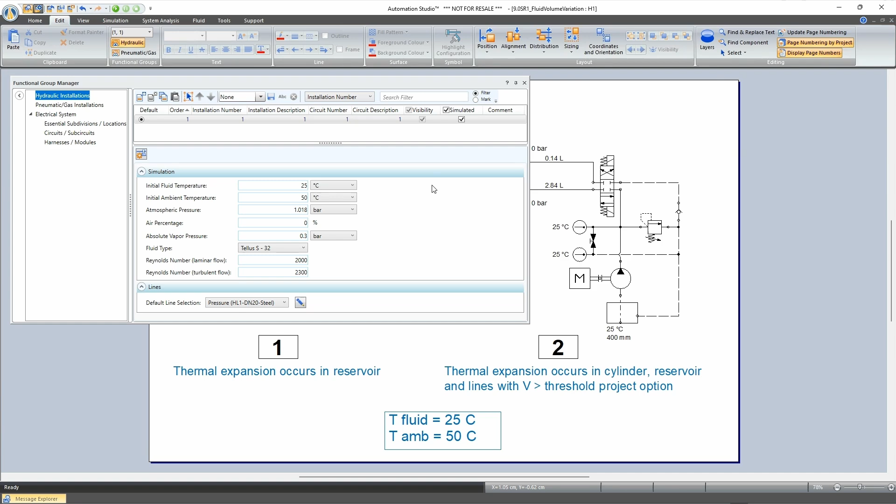So let's say if we want to evaluate the evolution of temperature in a project like this one, first we need to turn on the thermal evolution in the simulation options. In the hydraulic installations, we also have this setup. We have an ambient temperature of 50 degrees Celsius and an initial fluid temperature of 25 Celsius. This will lead to an increase of the fluid temperature by heat dissipation.

We start the simulation. We can see that the fluid starts at 25 Celsius and its temperature is gradually increasing. We can also see that the density of the fluid is changing with temperature. Here I've increased the thermal coefficient of components just so we can see things happening a little bit faster.

But what we don't have right now is a variation in the volume of the fluid. So here we can see the height in the tank does not change. That doesn't completely make sense physically. We should also see an increase in the volume of fluid in this closed loop as soon as the density decreases, aka the specific volume increases.

So previously, we didn't really worry about that too much. For example, for pressure drop calculation, the density of the fluid is the parameter that has an influence. But for some components like reservoirs, cylinders, accumulators, this can be a problem. So for this reason, in version 9, we now have the option to also turn on the thermal expansion of the fluid.

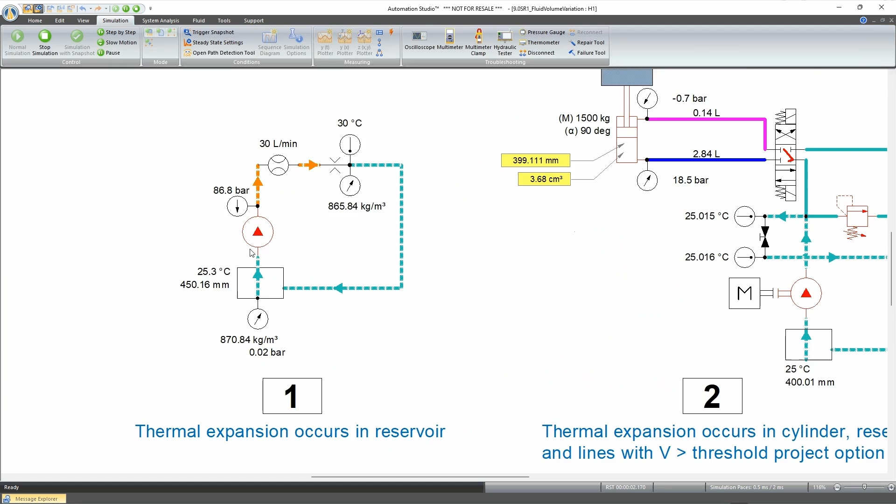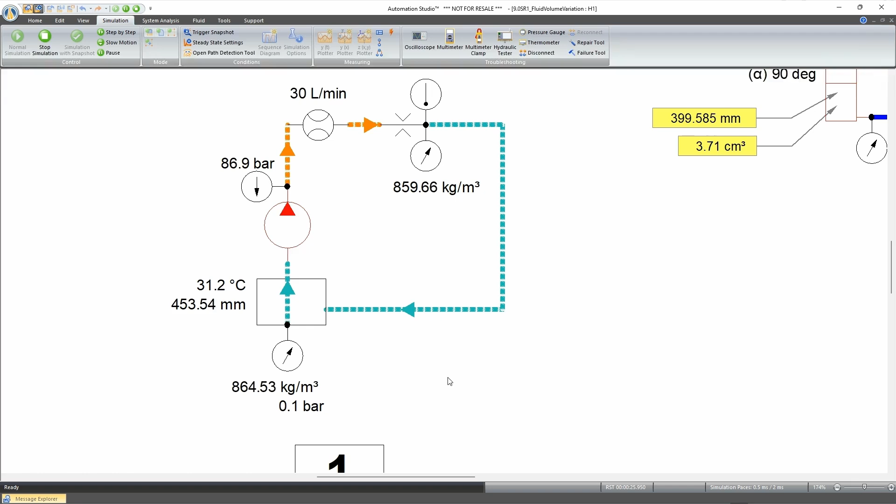Okay, so if we simulate again, now we can see the density changes with temperature, but so does the volume, as we can see by the height of fluid in the tank. This increase in the volume now is entirely due to thermal expansion. We can also see the effect of this on the pressure in the tank, which is slowly rising. And if we were to let this go for some time until the closed volume becomes saturated, we will see the pressure build up fairly quickly.

And we'll see this in cylinders as well, for example. Here we have a mass pushing downwards on the piston and the fluid is trapped. Initially the weight has compressed the fluid a little and then the piston slightly retracted, but then the volume increase builds up pressure, generating a higher force on the piston side than on the rod side. So the piston extends very slightly, but we're able to measure this. We can also see the measurement of the compressed volume on the piston side increasing.

So with this example, we can simulate what happens, for example, if a machine is left in the sun for a while and the fluid is heating up. We can show how the cylinder piston will slightly move due to that effect.

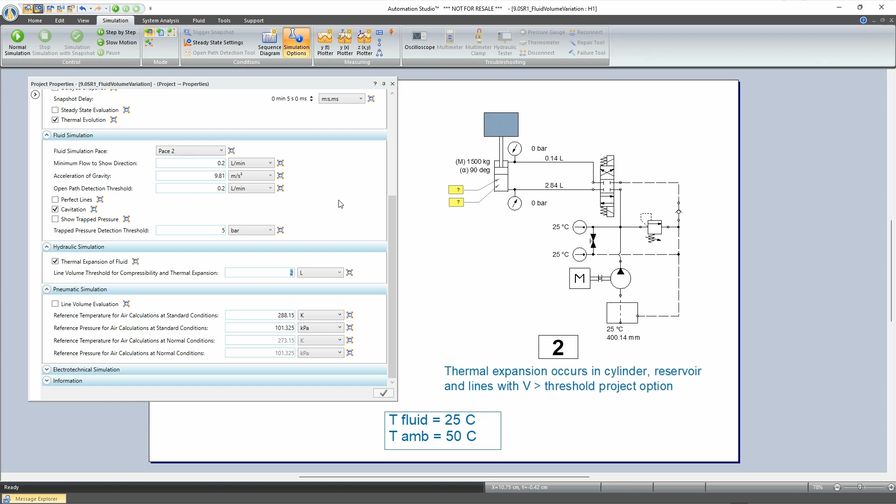So now this is taken into account in components, and this includes the volume in the lines as well. In the case of lines, there's an additional option: a threshold in the project options, meaning lines with a volume below this value will disregard thermal expansion. This mainly avoids running this calculation on every line of the project, which can consume computer resources not necessarily needed.

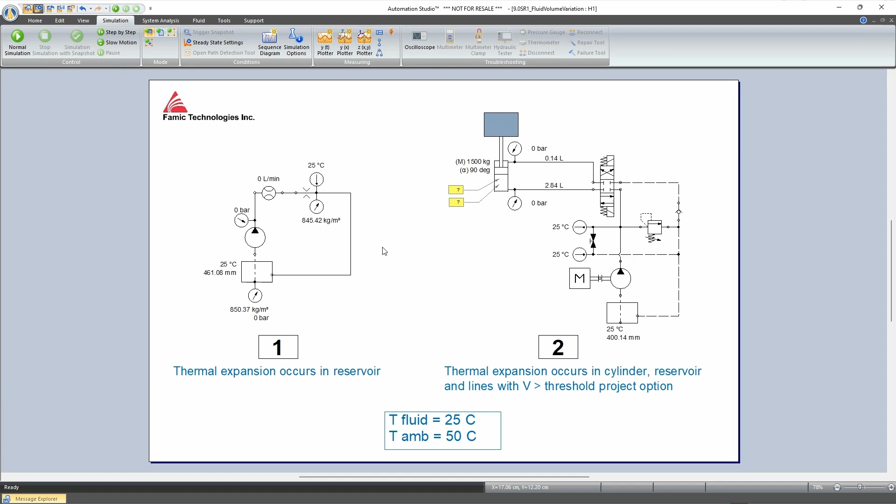One last thing to clarify: when we say thermal expansion, it does include the volume variation both ways. When the fluid cools down, we will also see a contraction of the volume. So that covers the essentials for this. We can move to the next topic.

This next feature is the possibility to display fields in bill of materials and reports in multiple languages at the same time.

Here we have an example project with a bill of materials already started with some configuration. We can see the component name property of the components used as a BOM field, and it's actually repeated 3 times in 3 languages: English, French, and Spanish.

We are using for this the translation manager, found here, which is first a tool that allows users to enter translations for text and display them in a chosen language, depending on who the project is shown to, independently of the current language of Automation Studio's interface. But the translation manager can only have one display language at a time.

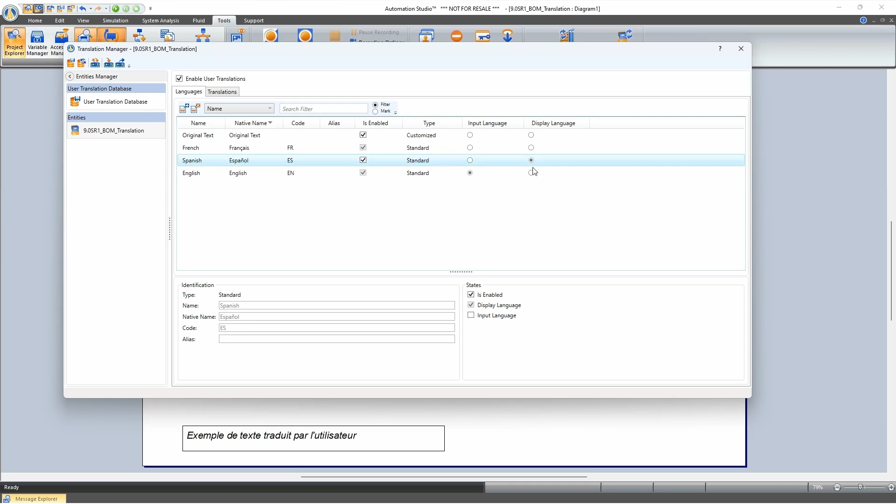What's new in BOM and reports is that you can now add a user translated property as a field, refer it to an existing property, and choose a language locally for this field. So I'm going to add another description for a few of the components in the BOM and have it display in 3 languages. I'll go back to the translation manager for this.

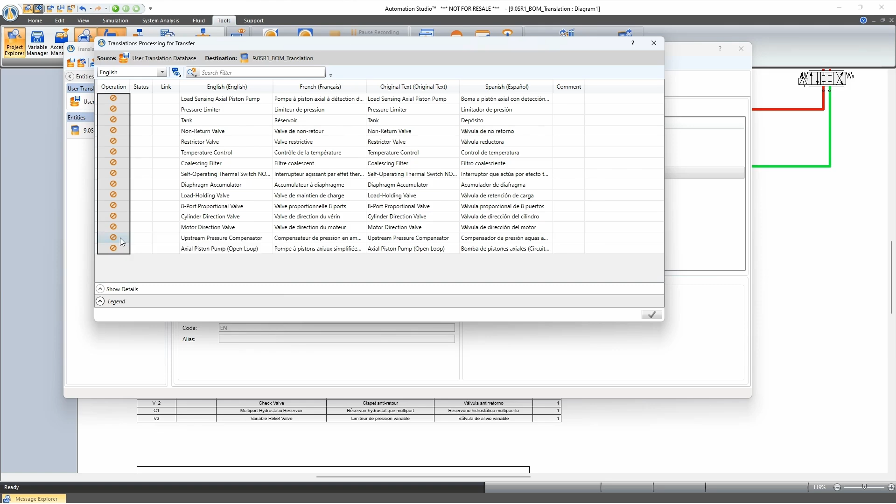First, I'm going to import the translations from the central user database into the project by transferring their dictionaries. These are the translations I'm importing into the dictionary of my project. We select the ones we want and apply. I could also directly import them into the project from a CSV file.

They are now added to the project along with the ones that were already there. Apply, close. So now in the BOM fields, we're going to add the catalog description property in 3 languages.

The values for this property are already entered in the components, in that property, in English. So first we're going to add the user translated property in English. We add a field, a user translated property, give it a name and an alias, and then refer it to an existing property, selecting which language it should be.

We see it up here. Then I'm going to do the same thing but in French: add a user translated property, refer it to the same property, set the display language, and finally do the same in Spanish.

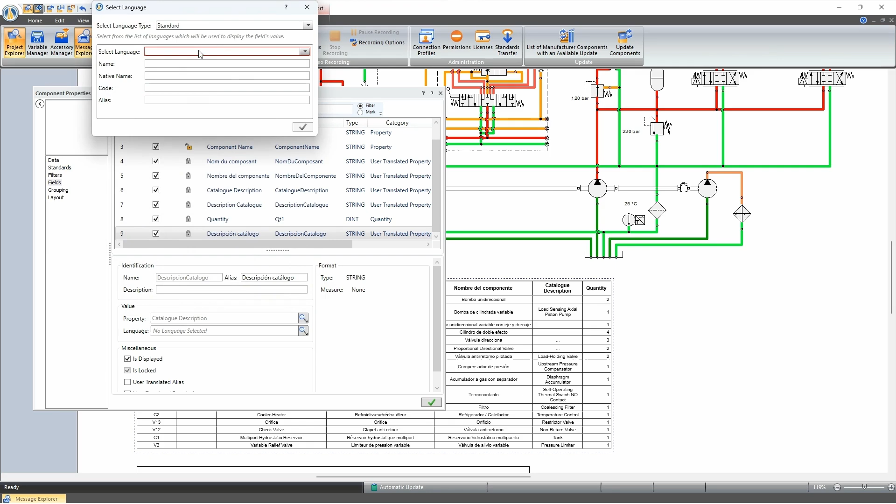We apply. Now we have the value of this field for the relevant components translated into multiple languages at the same time, independently of the current display language of the translation manager and of the interface language. They're always displayed in multiple languages at the same time without having to change any other language setting.

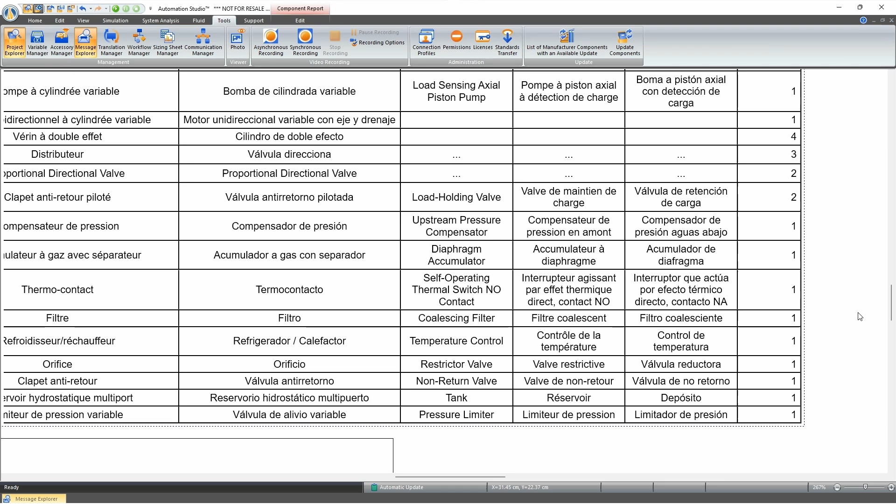And of course, the same thing is also possible in the spreadsheet reports. We can see here it is already done. That's pretty much it for this. Moving on to the next topic.

This next feature is the ability to display highlighting colors in areas of component symbols to identify some functions or states, including in simulation.

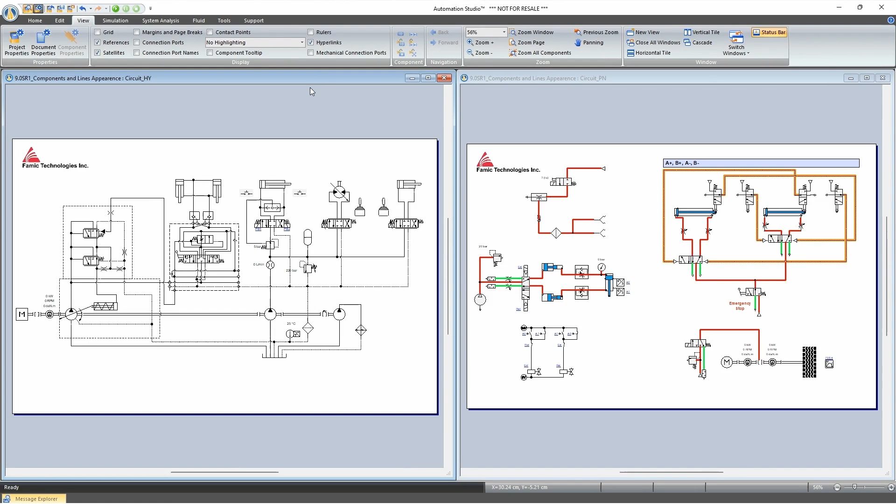If we start with this circuit, we have a clean black and white schematic, nothing else. First, we can turn on the highlighting of the fluid lines. With the configuration of standards already done in this project, we can more clearly separate the different line functions, such as pressure lines, return lines, suction, etc. Then we can also turn on this highlighting for components as well.

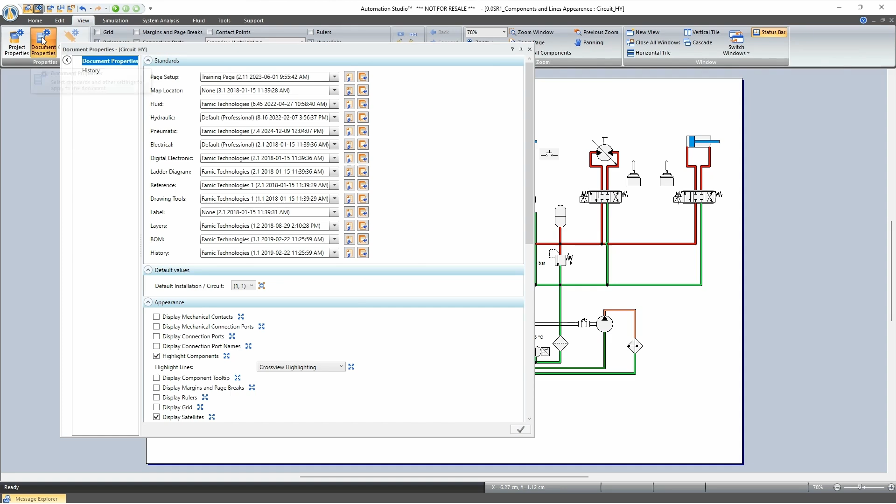So now we have, while in edition mode, the mobile parts highlighted in blue in the symbols, such as the cylinder pistons, and most of the other component surfaces shown in a light gray color.

If we start the simulation, now we can see colors starting to show up in some components. First, we have a dark gray for inactive states and yellow for active states. We see which spool positions are currently in use in directional valves.

We see the engine is turning, but it is not transmitting to the pump. Engage the clutch. So now the variable piston pump is activated.

We can see the pressure colors in the volume of the control piston, also in the fluid side of the accumulator. It's also showing another color to indicate a pressurized gas on the other side. We can see a few other valves and other elements show the active yellow color when there is flow or when they're doing their main function. So we can see the color of the different activated components and the color of pressurized volumes.

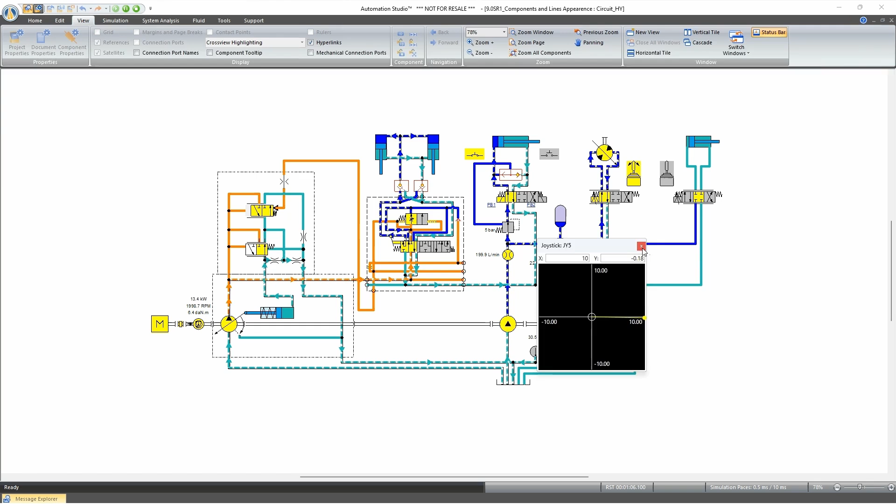There can also be a distinct color in lines and component volumes to indicate a trapped pressure when it's above a certain threshold value.

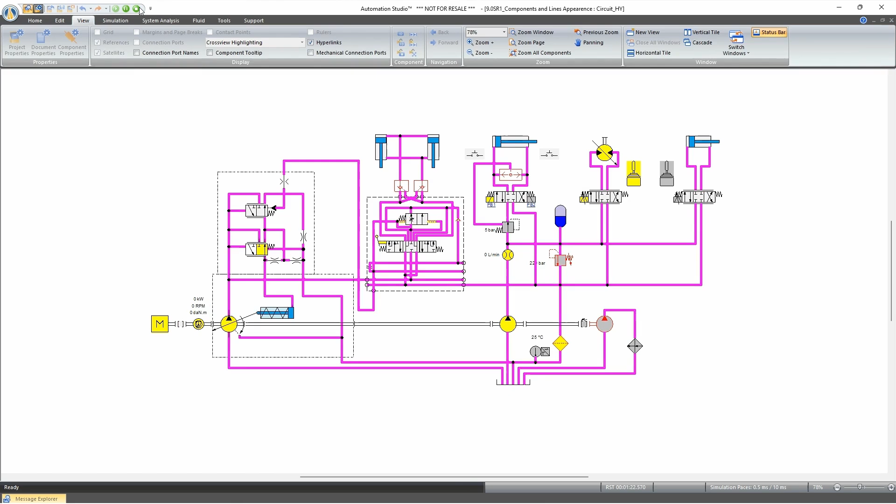So these different colors come from the configuration in the project properties. There is a category of standards for component appearance where all these things can be customized.

So we can see here the colors that we have seen on the various parts of the schematic. The symbol, line, color, and thickness can also be modified. And this standard can be attributed by type of component in the document standard.

So we could also choose to have some of those appearance attributes vary for some type of components. So just for pumps, let's say...

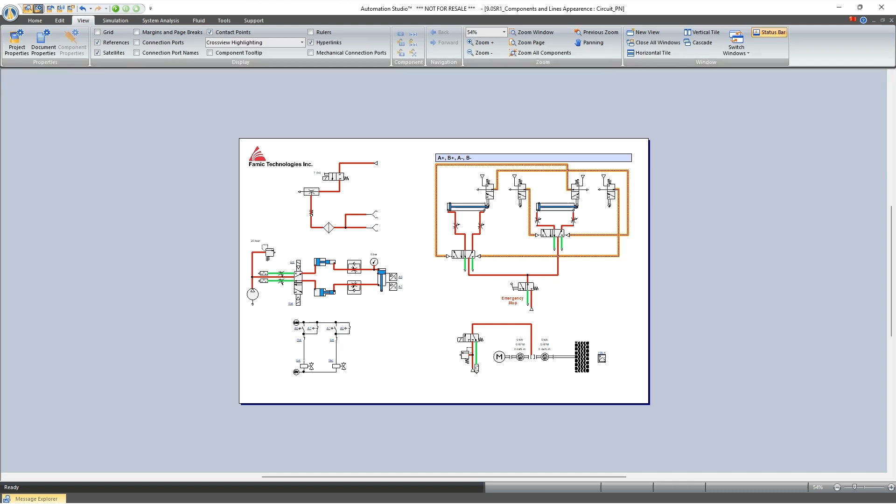And those things are now possible for components of the hydraulic, pneumatic, mechanical, and control libraries. So for all those components, we can use those colors to show more clearly some functions or states in a system.

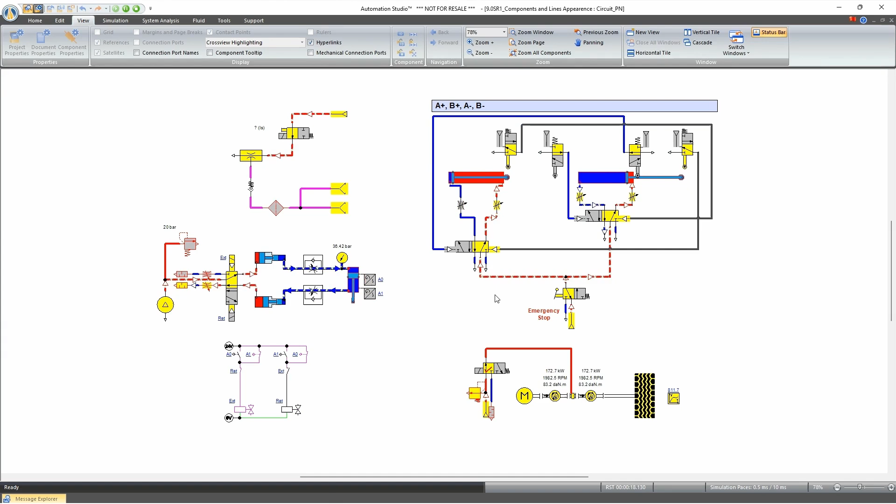And so just by changing a document standard and turning on properties, we can quickly turn a black and white schematic into a training or technical publication document.

Last thing to mention about this, it's possible to modify the configuration of those highlighting areas in the symbol if there is ever the need, or to add it in older symbols where it might be missing.

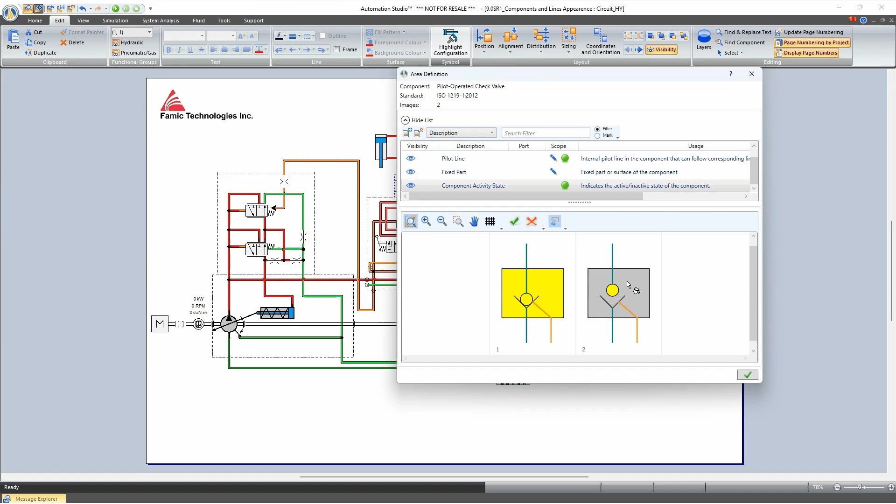For example, let's say I want those piloted check valves to show the active color in the whole box. I open the configuration tool, add it, and apply, and that's it.

And so that covers the essential for this feature. And that's it for me. So thank you, and I'll let my colleagues continue.

Thank you. We'll now take a look at our new Manifold Workshop updates that are available in version 9.0 and in the SR1 update. So I have opened a simple manifold block here in the Manifold Workshop, and this block contains a custom component from the Manifold Elements catalog.

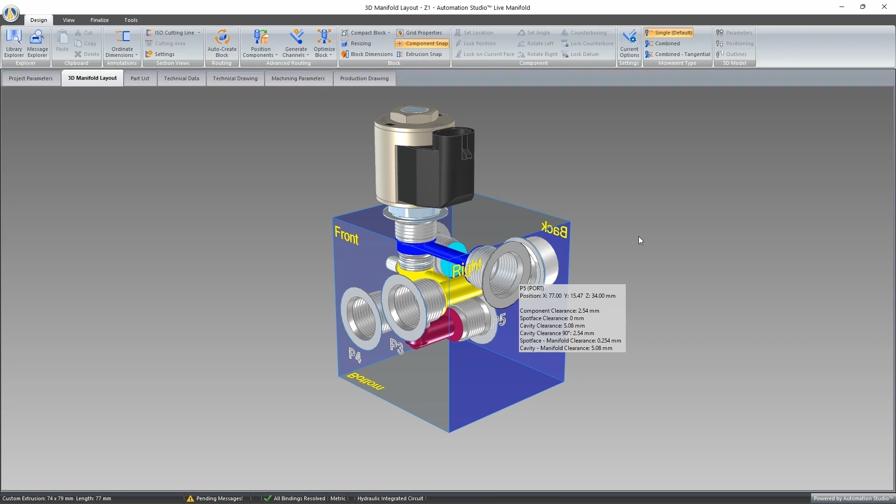And this is where we're going to take a look at our new feature, which is the use of step files for generic components, in addition to other components such as the port components. So if you have used the custom components in the past, you will know that they come with a generic shape that is positioned on them.

We can access the dimensions of this generic shape by right-clicking on it and accessing the 3D model parameters. And we can see some properties where we can define the dimensions of this generic shape, have it either be cylindrical or rectangular. And now with version 9.0, we also have access to the external 3D model feature and the no 3D model feature.

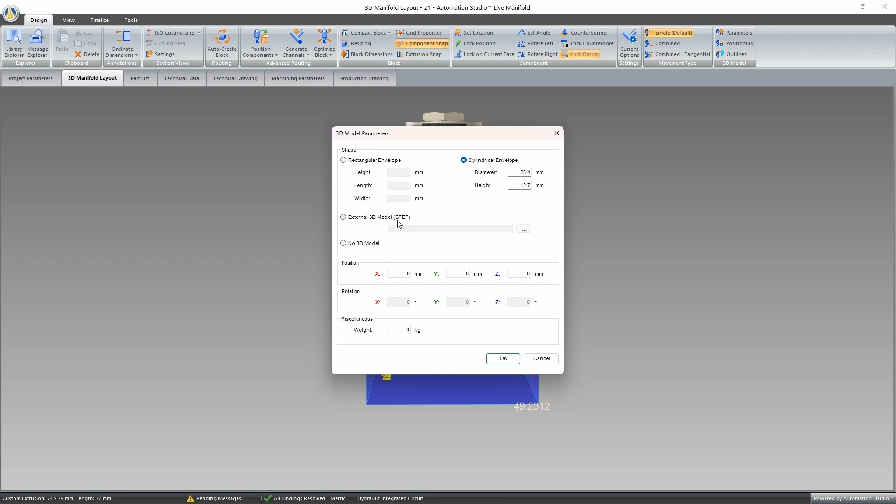So if we chose to, we can select no 3D model and have no 3D model appear. In this case, we're going to take a look at adding our own 3D model.

So I can click on the 3 points here and I will be able to load my own step file for this component. So I simply double click and then we'll be able to see our step file positioned inside of our cavity.

In this case, due to how the step file was created, it's positioned correctly right in our cavity. There are cases where you'll have to adjust the position, and we're going to be taking a look at that now. So I have a port here, an SAE8 size port.

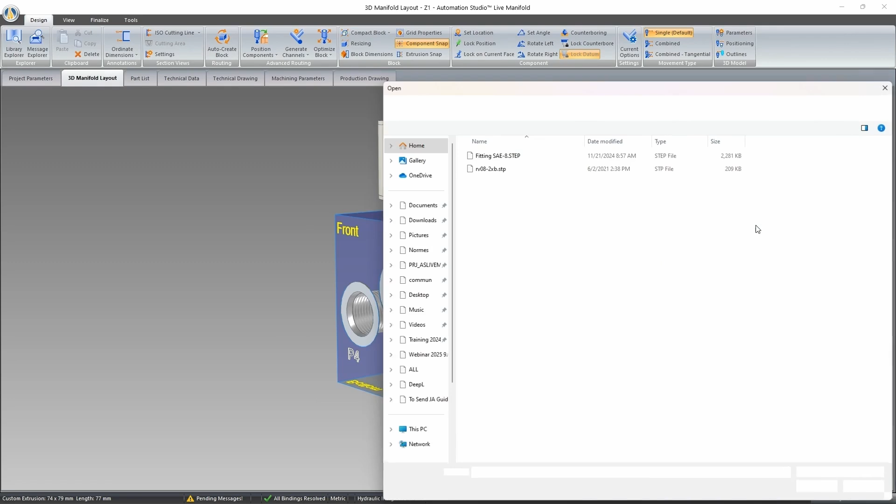I can right click on it and we'll see we have the 3D model parameters command that is also available. And I can go here and I'm going to add a fitting into this port. So I double click on my fitting step file and it will be added in proximity to my cavity, depending on how the step file was created.

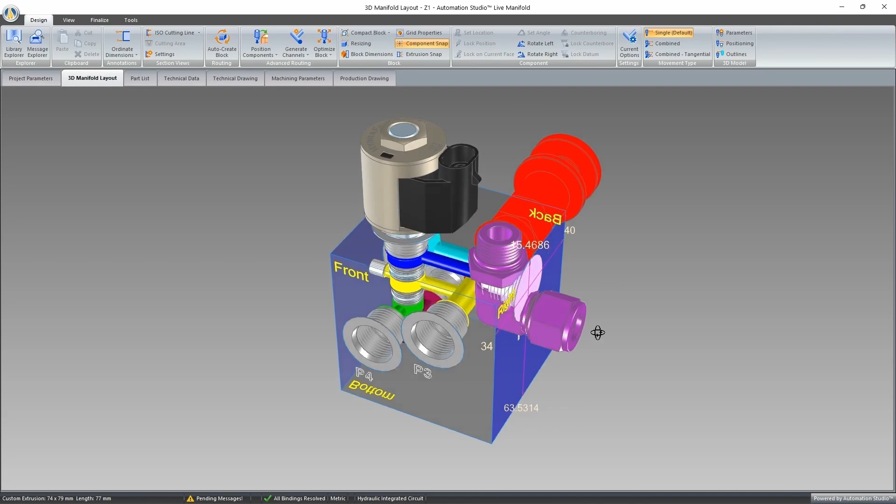So we can see here the positioning of this 3D model is not correct, and it's even in interference with some other components inside my block. So what I'll do is I can click on it, and then we have access to a new group of commands.

The one we're going to use right now is the positioning command. If I click on it, I'll enter a new mode. And if I enter flat view and select my component, I'll be able to rotate it with this view as a reference. So if I choose to rotate left, I can see that I now have the orientation that I want.

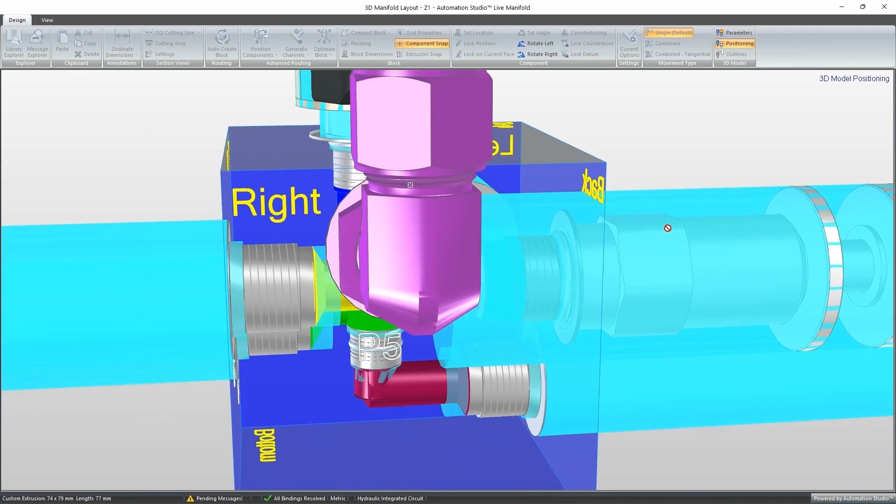All I have to do is adjust the position of the model with respect to the cavity now. So I can zoom in a little bit, click and drag, and simply position my model in my cavity how I want. If we're happy with that, the next thing I can do is either click escape on my keyboard or click on the positioning button to exit the view.

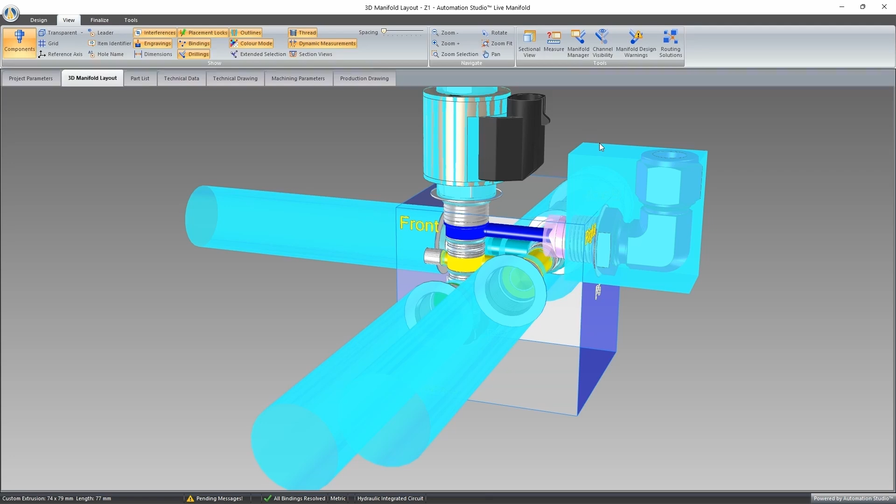The next thing we need to be aware of is that all 3D models have interference outlines. In the View tab, we have our Outlines command that we can toggle on and off. These interference outlines are used when we position our components manually, in order to determine if we're respecting our clearance rules that we've defined in our options, or when we auto-create to respect those clearance rules when we generate a block solution. If I go back to my Design tab, you'll see that in the 3D model group, we also have access to an Outlines command.

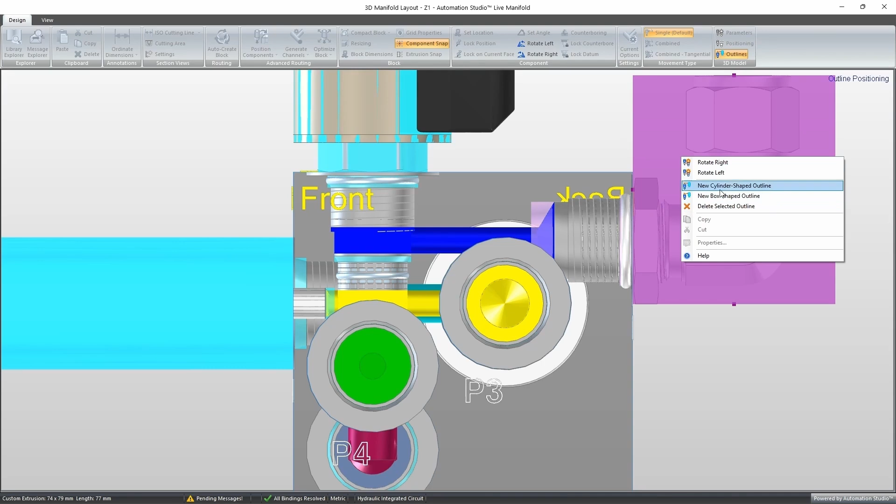If I click on that, we'll enter a mode where if I enter flat view, I can adjust the dimensions of this outline, my interference outline. I could choose to make it bigger or smaller or adjust its dimension however I want. If I wanted to, I could right click on it and reset it or delete it using these commands. I'm happy with this, so I can either click escape to leave this mode, or click on the outlines command once again to exit.

So now I've showcased this generic use of step files to replace our generic 3D model, or to add a 3D model to components like ports. The next thing we're going to want to take a look at, as a new feature, is the ability to add section views that we can use in our technical drawing documents.

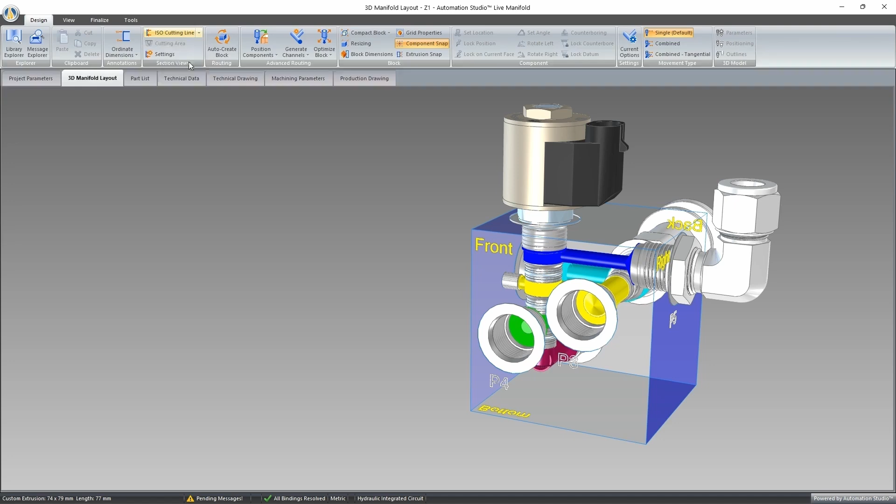You may have noticed, in addition to this 3D model group of commands, we also have another new group of commands, which is the section views group. Let's say I want to take the section view of this valve, of this cavity. I can go onto this top face and I can add a cutting line. We have access to the ISO cutting line or the ASME cutting line, depending on whatever you choose.

I click on it, and now if I click and drag on my document, I can create a cutting line. So I just click and it's created. Then I can adjust it if I want, just by clicking on this blue cube, and it'll snap to a point that's parallel to the right or left face of my block. I'm happy with that, and then I can exit my cutting line mode. This will allow me to now adjust its position.

So let's enter a flat view, and I can snap it to the center of my cavity. You can see it snaps to that center position. Now you can see that when it's not selected, I don't have access to this cutting area command. But if I do have it selected, I have access to this cutting area command, and I can click on it.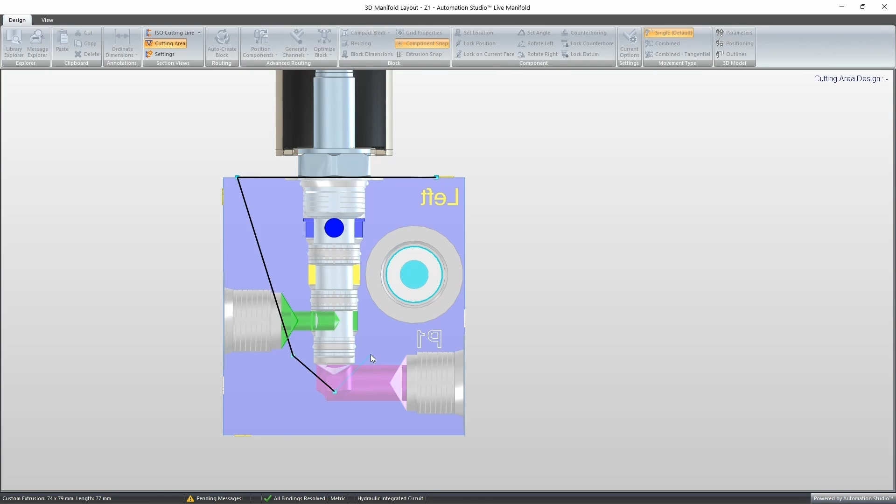What it'll do is bring me into a specific flat view mode where I can draw the specific cutting area that we want. So I can do something like this. Click on my endpoint, and now I have a cutting area defined. I can adjust it, or when I'm happy with it, I can click escape, or once again on the cutting area command to exit that mode. And we can even see now our cutting area on our 3D block.

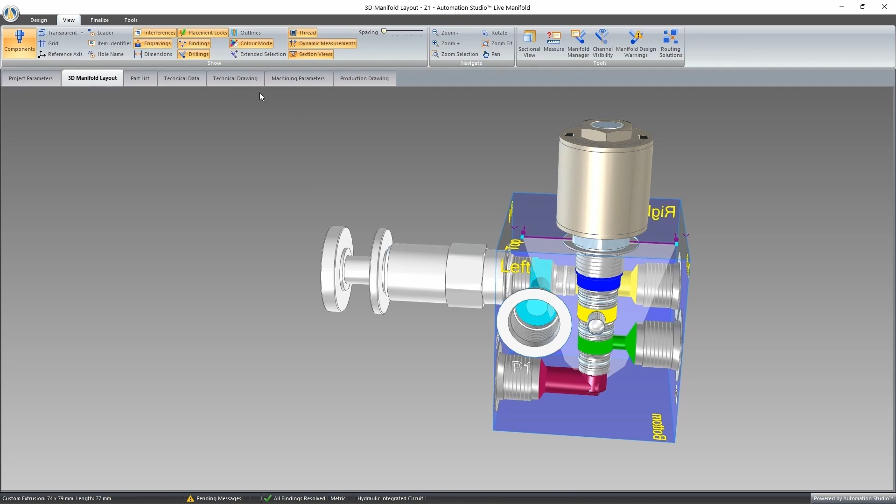The next thing I'm going to want to do is go to the View tab, and I can choose to hide this. So if at any point I don't want to see my section view on the 3D model, I can toggle it on and off. Then when I'm ready to go to my technical drawing and place it on my drawing, I can enter my document. If I open the Library Explorer, I can see that my view is being generated for the first time, since we just created our cutting area. Once it's created, I'll be able to simply drag and drop onto my drawing document.

Now I can zoom in a little bit and show some new commands available on our drawing documents. These commands relate to annotations. You may be familiar with ordinate dimensions and linear dimensions that we can add to our multi-view projection. We also have the ability now to add angular dimensions.

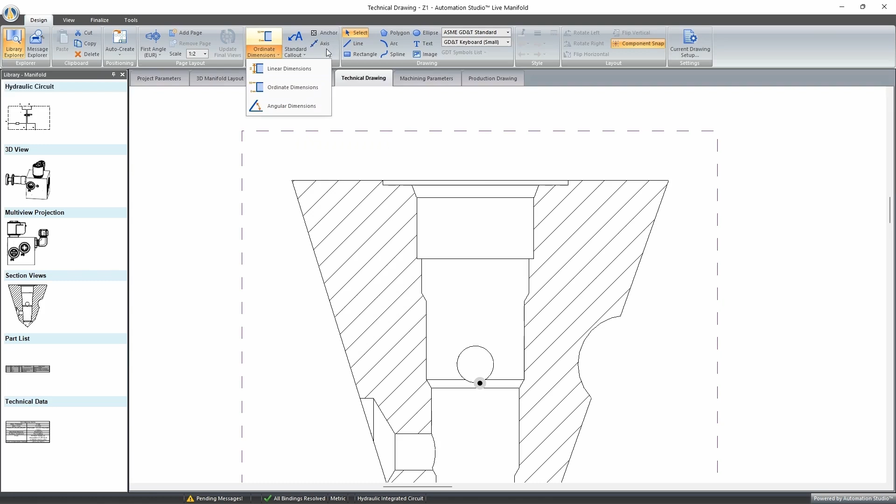To add angular dimensions, we need to create some axes within which to measure that dimension. If I click on my axis command, I have some anchors automatically created. I can choose to create new anchors if I want, but I'll use these existing ones for now. I simply click on an anchor and click somewhere else, and an axis is created.

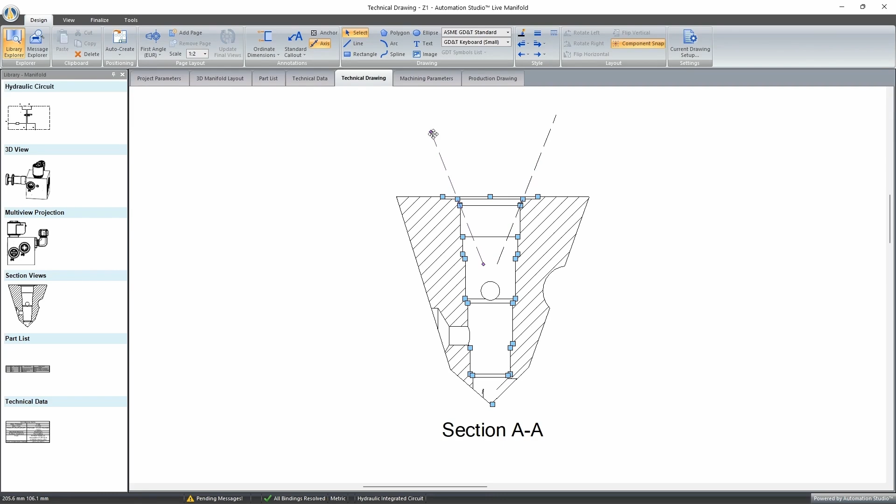If I want to snap it to another anchor, I just move it and you can see it snaps to another anchor. I'll do the same thing for this other side, adjusting my axis until it snaps. Then I can toggle off my axis command when I'm happy with what I have.

Next, I'm going to create my angular dimension. So I click on my first axis, click on my second axis, and I have an angular dimension that's created.

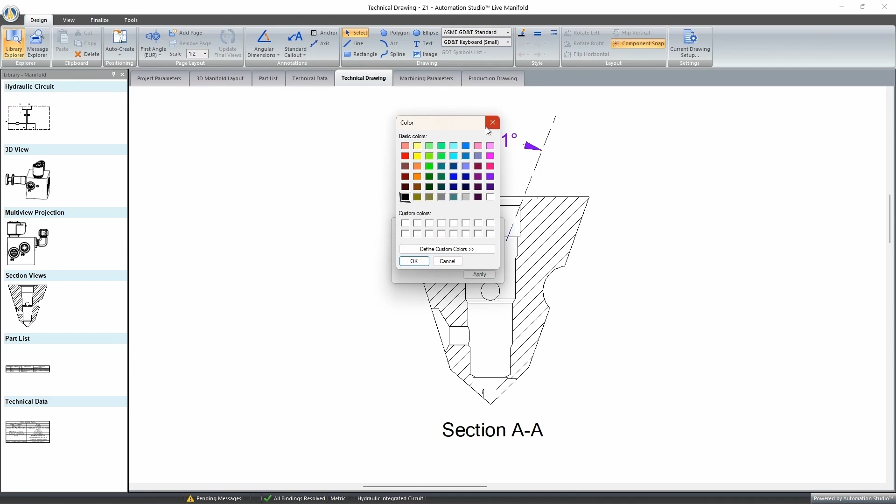We also have the ability to adjust this dimension. If I wanted to show 43 degrees, for example, I simply right click on my dimension value and click set angle, then adjust one of the axes to have my new angle. So I put 43 and adjust my axis 1 in red. If I wanted to, I could adjust the color by clicking here for representational purposes. I click apply and I have the angle displayed.

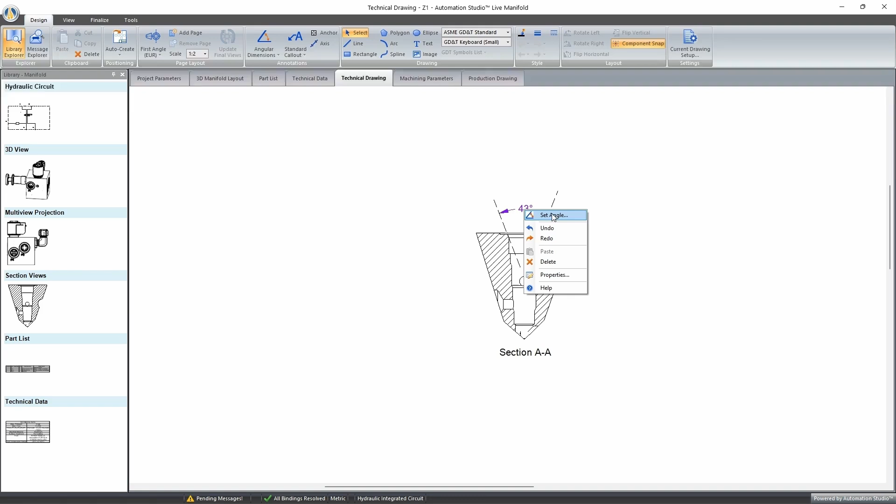I'll also mention that for the normal dimensions, the ordinate and linear dimensions, you also have the ability to adjust these. You can right click on the dimension value and set dimension to adjust its value as displayed on the drawing document.

The next thing we can take a look at is the title block editor. Let me just delete this. At the bottom of our document, we have a title block. In the past, we used an XML file to create our title blocks, and users could go in there and create them manually by adjusting the XML file to position lines and texts. But now we've simplified this greatly.

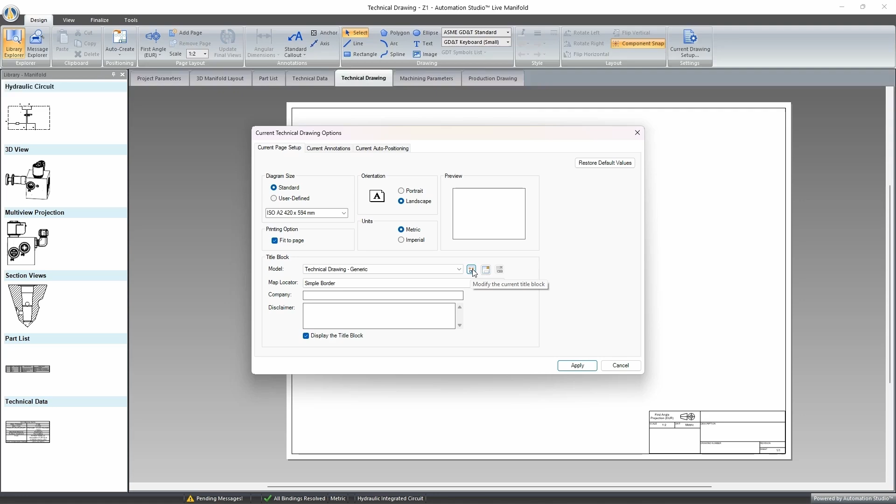If we access either our default drawing options or our current drawing setup, we'll see new commands available in our title block section: modify the current title block, create a new title block, and delete if we wanted to. In this case, I'll just click on modify the current title block to showcase these features.

What's important to note is that a title block consists of a frame. If I select this, this is the frame. You can see in the drawing commands we have these frames we can insert, so you can have multiple title blocks, or multiple sections of the title block, on one document. If you want one in the bottom right and one in the top left, you can have that.

We also have different text inserted as well. If I double click on something like this metric unit system, it opens a properties window where we can see three different types of text properties we can display in our title block. We have a project property, which can take something from our project parameters document, such as the material we're using, or something like the unit system selected when we first create our manifold project. You have a list of different properties to select from, and these will be taken automatically from the software.

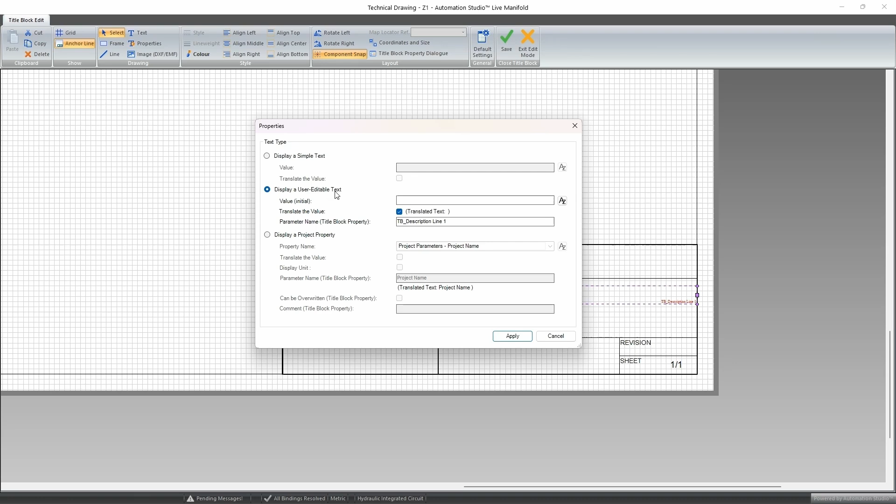You also have access to user editable text, which comes into play in things like the description over here. If I double click on it, we can open up its properties, and we see this is a user editable text. If I open up the title block property dialog, we can see that these description lines are modifiable by the user, they don't appear in gray.

So when we exit our title block editor mode, we'll be able to adjust those values if we wanted to. And then finally, we have simple text, things like the description here, which is just the title of this section of the title block. If I double click on it, I can open up the properties and we can see this is a simple text.

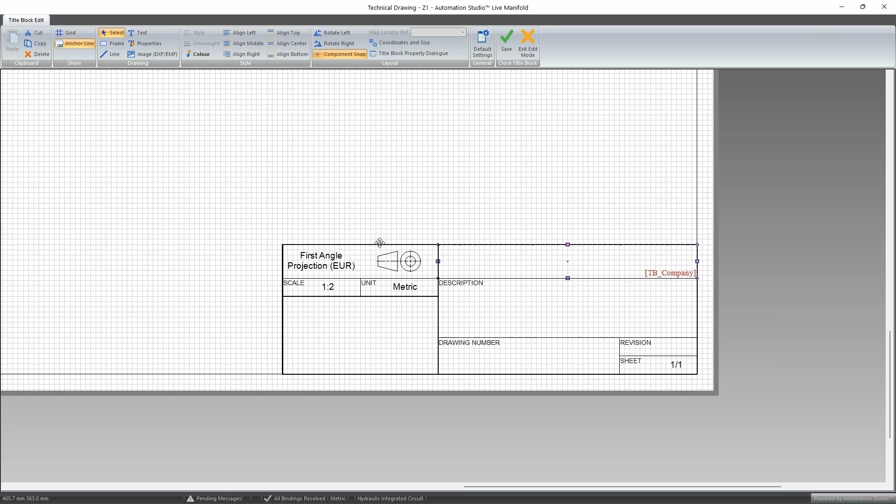By using lines, we can create our different sections. We can add logos for our company if we wanted to. When we're done, I can adjust the position. So if I wanted to move this to the top left, I can very easily do that just by clicking on our map locator reference and put top left. You can see that it's adjusted its position. Very, very simple. I'm going to exit the mode without saving.

And here we'll cancel that, and we can see our title block. If I were to double click on it, I gain access to the window that we saw before where we can adjust certain information. We saw our description line, so I can put the ABC. We can modify it as we choose. This covers the new title block editor and the ability to create custom title blocks very easily.

A next new feature that we have available is the improvement to the database system for block cost calculation. We have the Excel price calculation, which exports the machining parameters into a template document where you can take all the values and calculate the prices using your own formulas in Excel, giving you the full power of Excel. And we had our SQL system, which used formulas predefined in the database. We wanted to add more features now that we have the Excel price calculation, to make it more powerful.

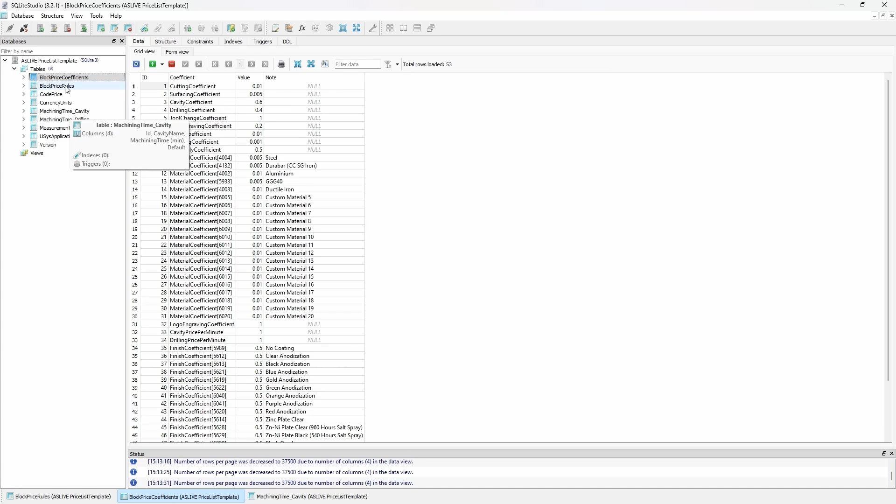If I open up my database, we have new tabs available, new tables which are the machining time for cavity and machining time for drilling. Previously, if we look at our block price rules, we had calculations, for example for the cavities, which will be the number of cavities multiplied by a cavity coefficient defined in our coefficient table. In the case where we add a machining time for a specific cavity into this table, you just add that VC08-2 cavity, for example, and it takes 1 minute to machine. If we do that, the formula will change, and it will instead use the coefficient for cavity price per minute multiplied by our machining time multiplied by the number of cavities.

So we have the ability to have a more refined formula for our cavities or for our drillings. We can see that for the drillings, the same thing applies for different diameters. Depending on the unit system, we have a drilling time that is available as well.

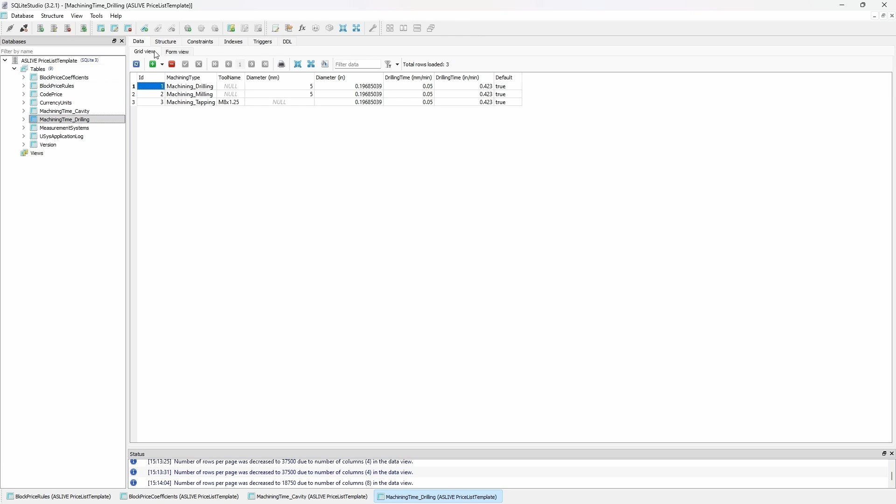In addition to that, some simple drawing features were added here. You have the ability to add splines on your drawing documents. You have the ability to add arcs that you can adjust however you would like. And you also have the ability to create polygons as well.

So this covers the new Live Manifold updates for version 9.0 and SR1. And now we'll move on to the next section, which is the Q&A. Thank you.

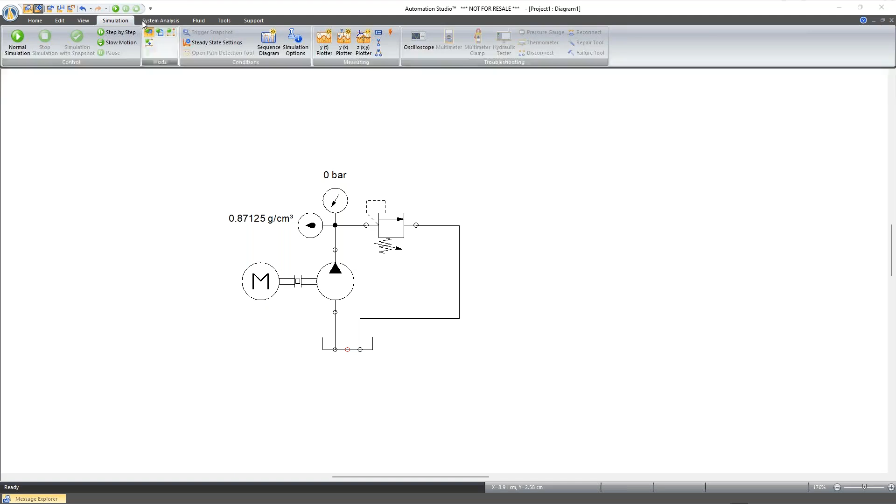So to demonstrate it, right now, if I vary the temperature, the pressure in this point, and my thermal evolution is off, so temperature is not changing, we can see the density does not change at all. So it's the one aspect that is currently not considered.

Good. Thanks for the question and the explanation. We have another question here. If the expansion in a closed volume causes the pressure to increase, is it possible to receive a warning?

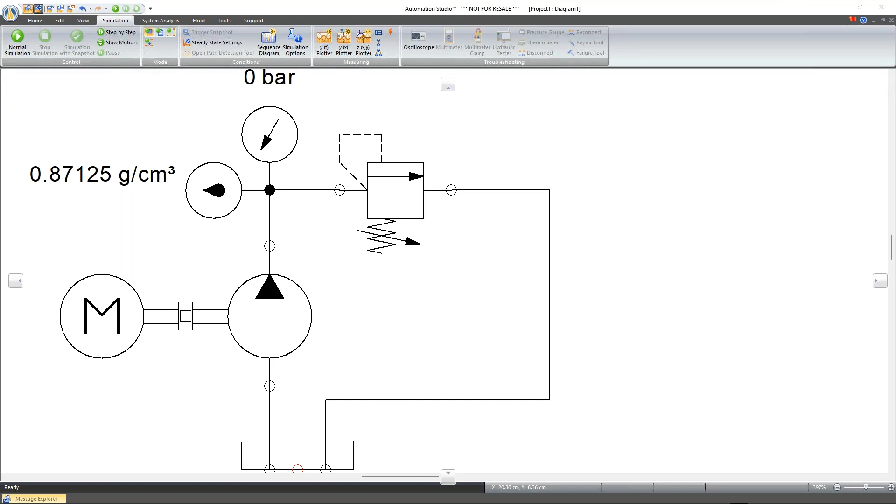I don't know, Phil, if you're speaking, you're currently muted. Yes, yeah, so that's a good question. Okay, so yes, you can. As always, if you check the option in the simulation options to get warnings for faulty components, this will monitor the value of each component's maximum pressure, maximum flow, maximum temperature properties. They all have, most of them, those operating conditions properties. It will monitor this value and trigger a warning when this is exceeded.

So to demonstrate it, let's say in my cylinder, I will exaggerate. I'll put my maximum pressure to 3 bar just so we really get there faster. And I'll also remove the load, my kilogram, I'll set to 0 kilogram. So we will only see the pressure build up from the thermal expansion here.

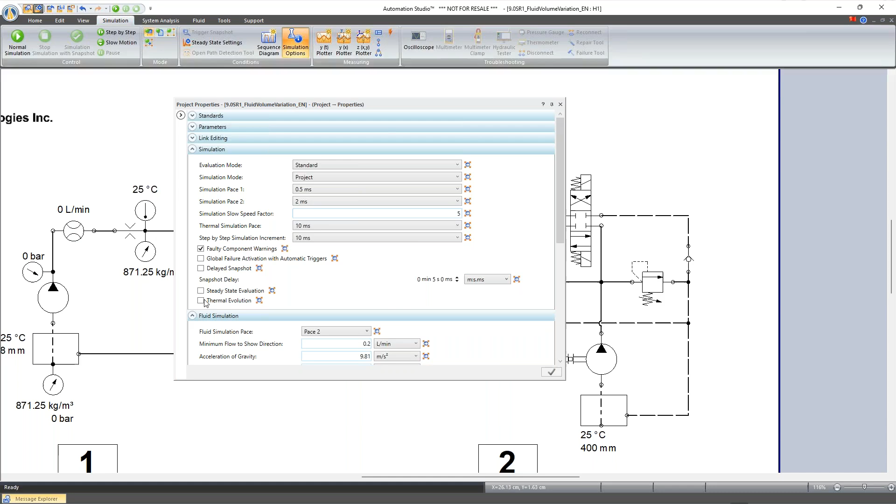Yeah. Just making sure, yeah, I had turned it off. So...

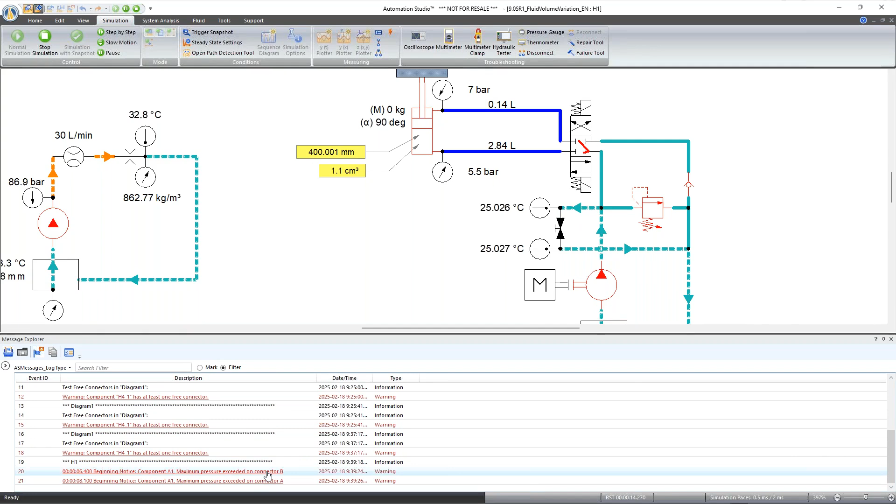Okay, so now we're seeing the pressure rise from that, from thermal expansion. And when we get past the maximum pressure, 3 bar, we get this little warning sign. It also gets listed in the message explorer with a reference that redirects you to the component. So yeah.

Good. Thanks for answering that question. We have a couple other questions related to the bill of materials, for what you had shown basically on the bill of material translations. Is it possible to create a translation for any property in the bill of materials?

Yes. Yeah, so yes, as long as the user translations for the values are in the project dictionary, they can be translated.

Okay. Yeah, sorry. And it's also not limited to standard component properties. It can also be done with user-defined properties. As you know, you can add user-defined properties. Let's say I add a global property to all my components. I'll just name it test. So now I add this custom property to all my components. So if I open up the properties of a component, now I have this test.

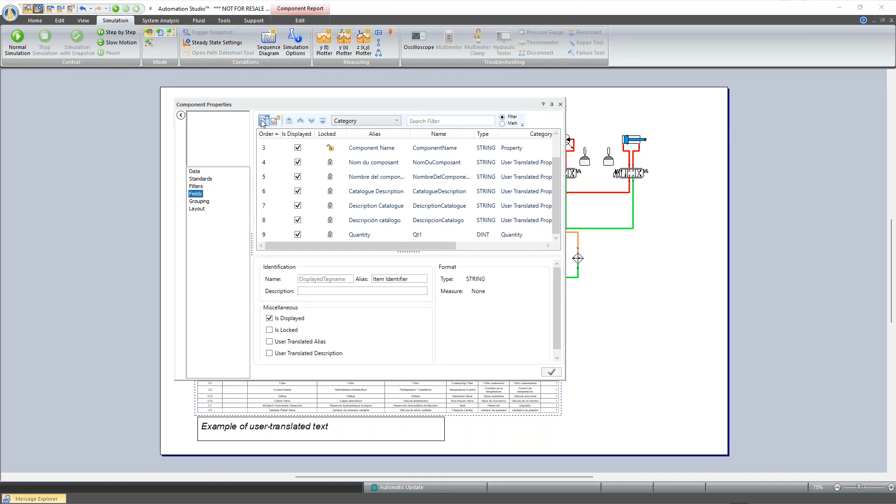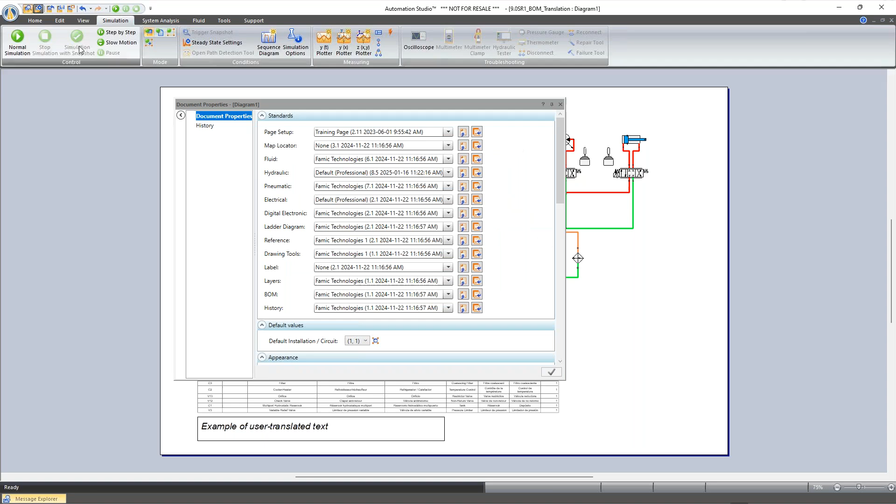I could populate the values here, and in the BOM, if I had a user translated property, I would just name it test, and I can select as the reference property the custom property that I have added. So I won't do it now because nothing will show up, I don't have the translations ready for that. But you can also have user translated property fields for custom variables on components, and also for document properties. So these documentation properties on documents can also be user translated fields.

Thank you. Good. We have one more question here. Okay, maybe I'll ask this question on the BOM, then we'll move back to the simulation questions. Is it, for the translation database, if I have an Excel with translations, can I use this in the translation manager?

Yeah, sure. So as I mentioned briefly, you can import translations in a dictionary from a CSV file, either in the project dictionary or the central user translation database. So here in my translation manager, what you always have is import dictionary, so either in the general database where I already have a few terms, or specifically in this project. So you browse and you bring up your list of terms in CSV. For example, I have those. I would select to add them to my dictionary. I won't do it now.

Yeah, so if you have it in a CSV file, you're able to import it. And if you want to know the expected format of the CSV file, the easiest thing to do is to pick any existing translation and do an export. Send it to a CSV file, and you'll see how it's supposed to be laid out, what the fields should be, then populate that CSV file and import it back into your file.

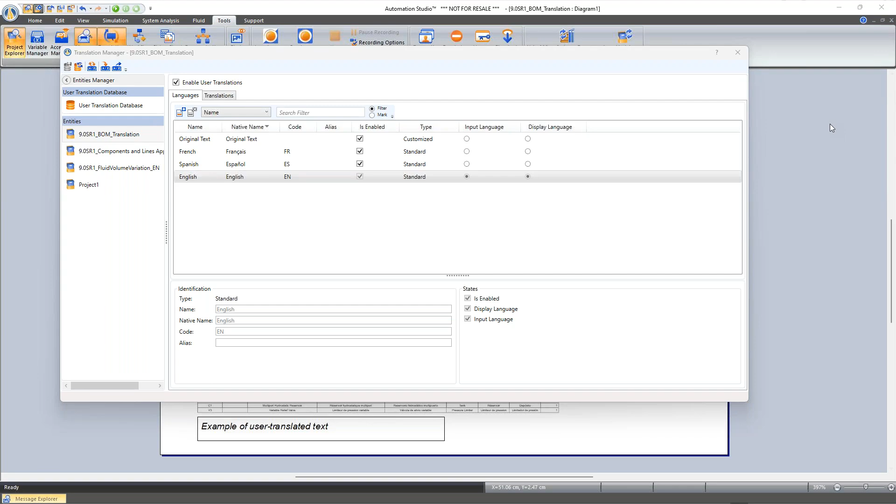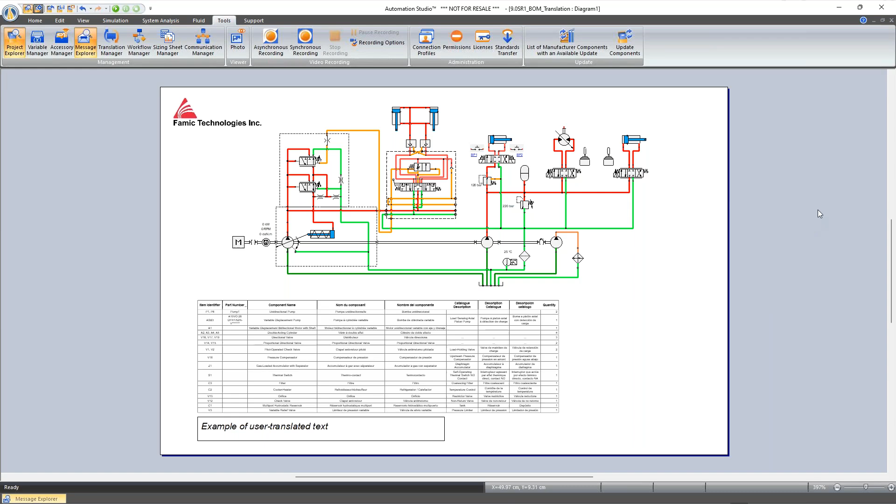Yes, I'm pretty sure you can. If you get a pressure change from a temperature change, so if a temperature change causes an expansion that leads to a rise in pressure, it will be simulated by the accumulator. I guess one easy way to do this would be to add an accumulator in this project.

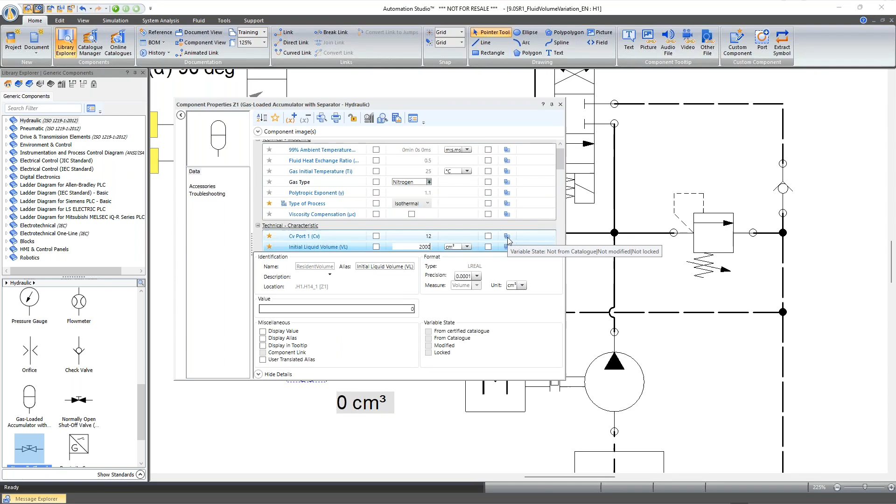Yeah, sorry, of course I need my library components. So the accumulator also considers the thermal expansion of the fluid. I will also put, no, not here, I'll put the normally open shut-off valve here. And as soon as there is an initial volume in the accumulator, right now I'm still in this project where I have heat dissipation with the ambient temperature.

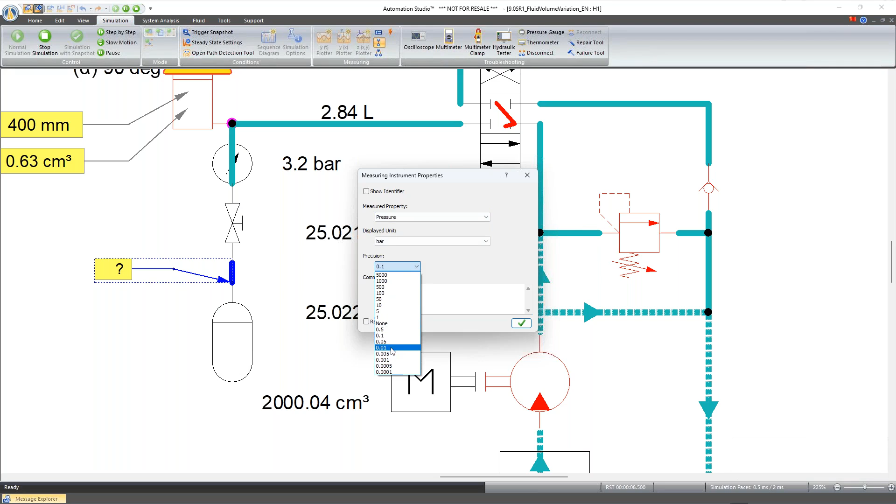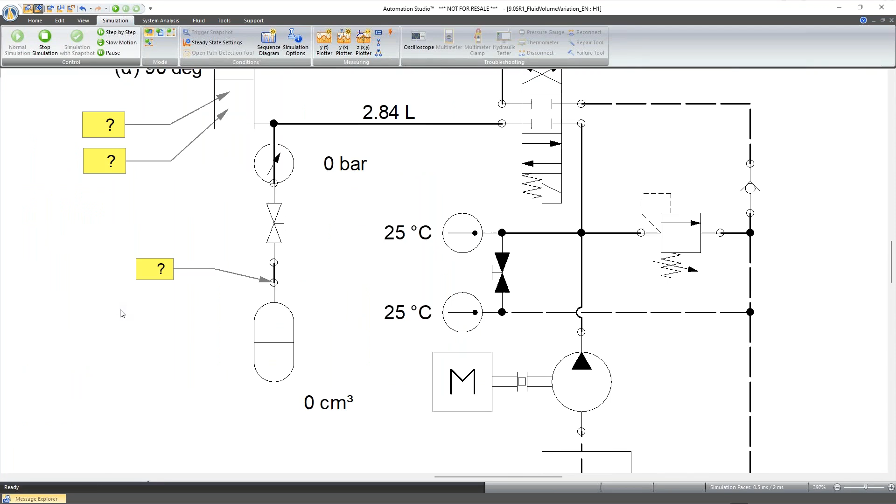So naturally my temperature is rising, and so there is thermal expansion occurring with the fluid volume of the accumulator. We can see it's slowly rising to 0.05, so it's very slow. If I increase the precision of that, I'm getting a little pressure variation in this value. To do this faster, what I would actually need to do is exaggerate the heat transfer coefficient. Okay, and we can see a small pressure variation due to the variation of the temperature.

Okay, very good, Phil. We have one more question here. Let me see if I can read it properly. Continuous high pressure will result in temperature rise, and ultimately will result in oil density change. Does Automation Studio have the capability to show this?

Yes, if what is meant by the question is that high pressure results in temperature rise, and this temperature rise results in oil density change, then yes, this is taken into account. For example, here, if my oil is going through this orifice that I set to be a smaller diameter, don't pay attention to the warning sign here. Okay, so I'm having a considerable pressure drop through the orifice.

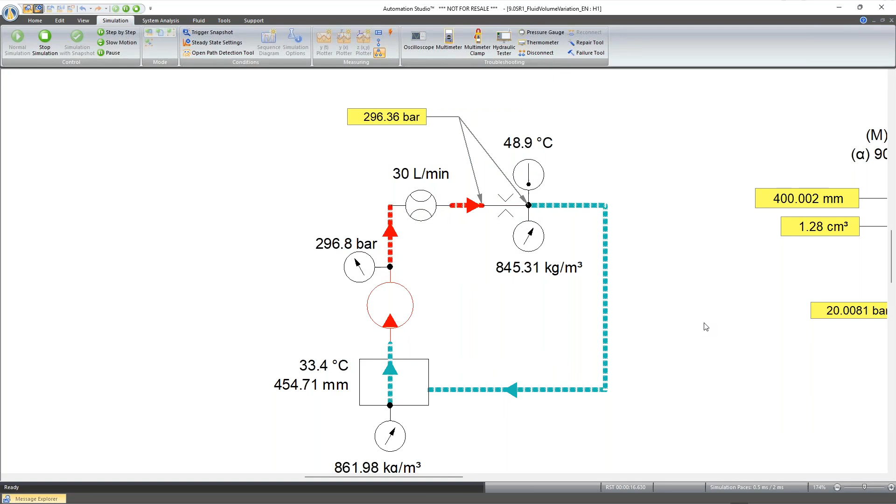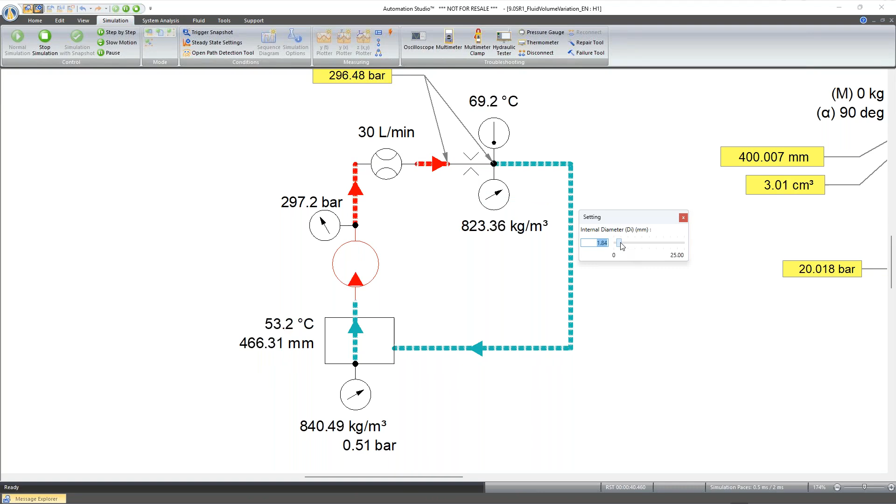And this is causing a rise in temperature, and this of course causes changes in the density of the oil, which then increases the phenomena of thermal expansion occurring with the volume in the lines and the reservoir. We can see the height in the tank rising. If I set this even narrower, my temperature increases way faster now. I'm also getting those warnings as I still have the option turned on. And I can see the effect on the fluid density here.

Very good, Phil. Good, I see there's a couple more questions here. There's a question that's a little bit on a different topic that you had demonstrated, Phil. It's related to the component appearances. So the question is, you're saying those criteria on colors can also be different depending on component type?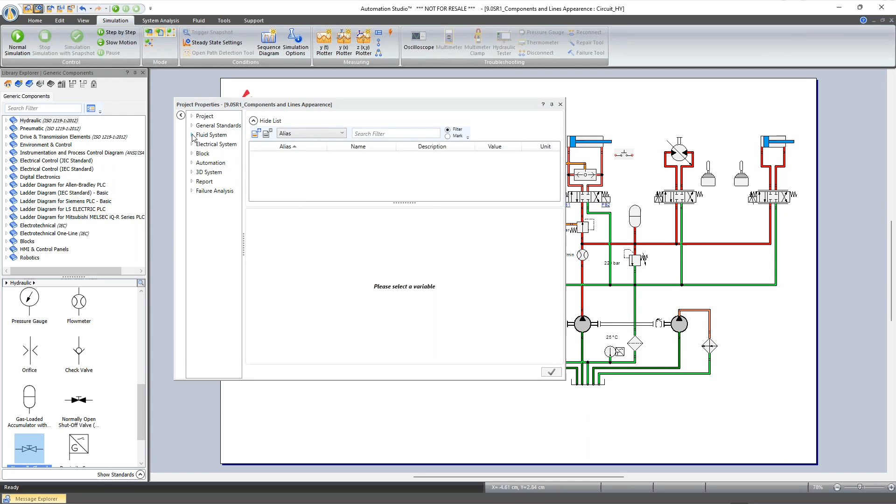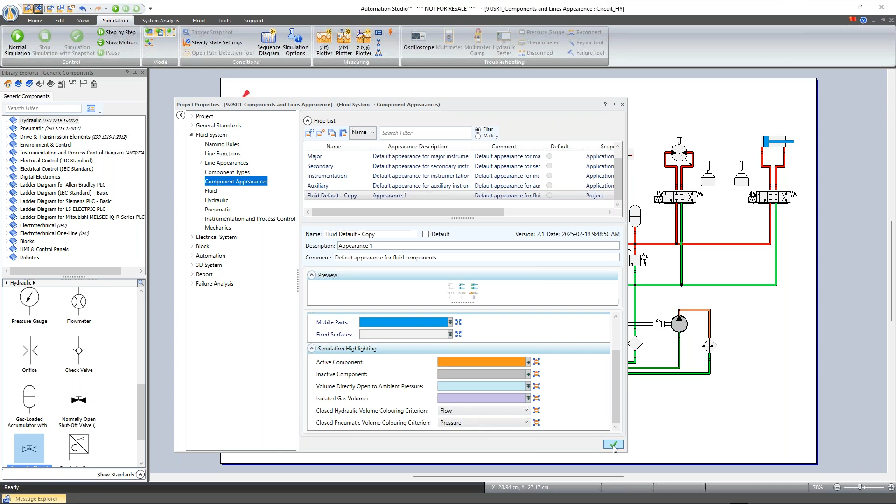Yes, correct. So for example, let's go back to the component appearances standards, which are here. So what we can do to demonstrate this is I'll just make a copy of the default one, and I'm going to change a few things. I'm going to say that in this components appearance standard, the active component color instead is going to be some orange color. And also the criterion for the color of the hydraulic volumes now is going to be flow instead of pressure. Okay, but now I need to assign this.

Okay, yes. So now when we simulate this, we can see that my instruments, my pumps, when they're active, they're in orange instead of yellow.

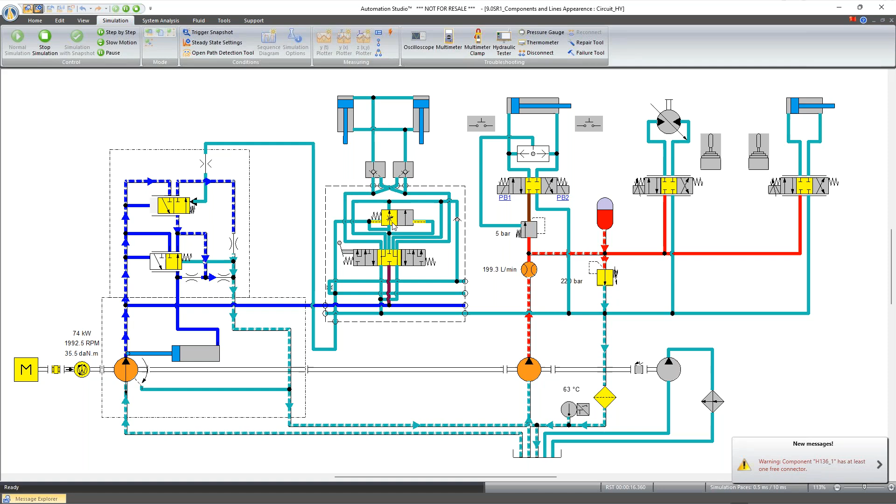The other components are still using yellow when they want to show the active state. Also, if I energize some actuators, we can see, but not as clearly now, that for actuators as well as the volume of fluid in the piston of the variable pump, the color is now based on the flow.

We can't see it as clearly, but maybe if I pause, the colors now are not always the same as the ones in the lines. The lines are still going by pressure, but now the volumes in the actuators are going by flow.

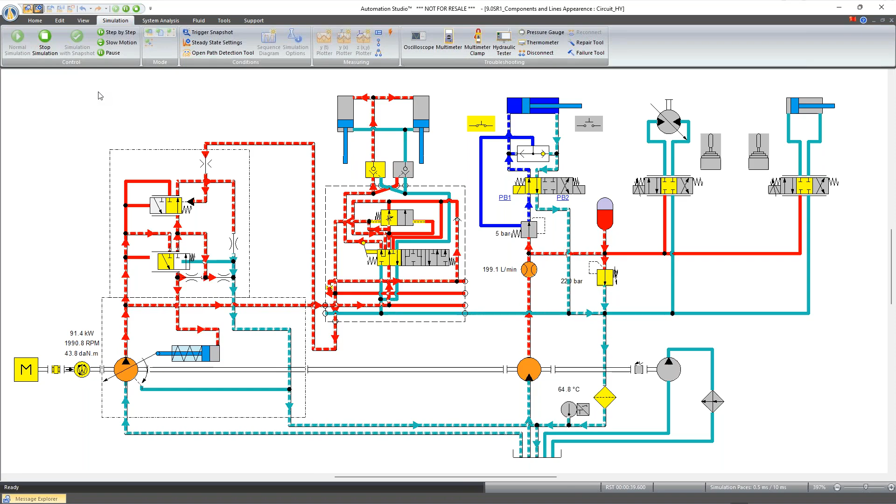So you can configure those appearance settings to be different depending on component type. Just as a reminder, all of those colors are coming from the line appearance standards. Those colors were primarily intended for lines, and this is where they are coming from.

So we can see where those colors are coming from when you're going by pressure or going by flow. Those colors are with the threshold values, this is where it is coming from. You can also go by speed or velocity of the fluid in the lines, as well as temperature. In the case of component volumes, internal volumes of components like a piston, rod volume of the actuator, it can be either by pressure or flow, or you can set it to none also.

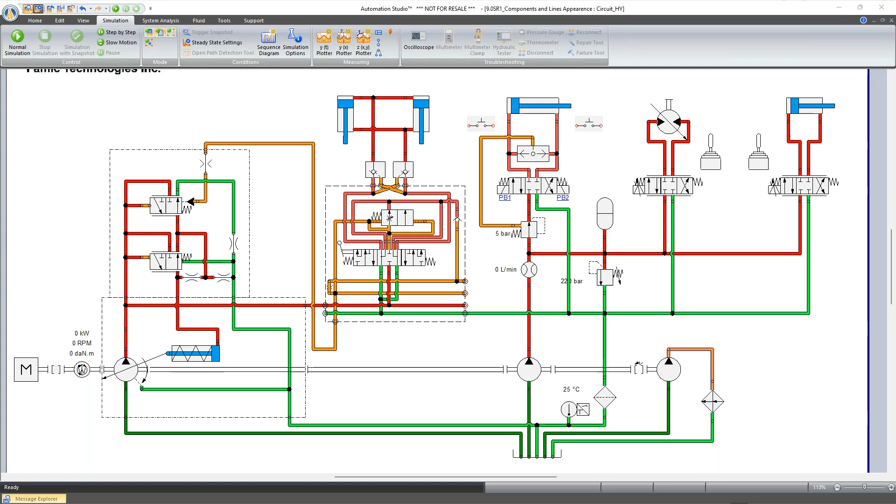When we're talking about drawings, I'm not sure if the question is about already having a schematic completely created externally. If this gets imported, let's say as a DXF file, it will not be recognized and matched to actual Automation Studio components. So in this case, if that is the question, they will need to be recreated in AS. But of course, using the catalogs, you're able to browse through all the libraries of different manufacturer components and build your circuit from that, and the characteristics are already modeled in.

If you want to check the operation and simulate failures, you'll be able to test that using the components and all their specific properties. Of course, using the troubleshooting module, you'll be able to add failures to any of those components, whether they come from the general library or particular manufacturer components. I'm hoping that answers the question.

Maybe we can showcase just really quickly the online catalogs. I don't know if everybody knows that these exist, I'm presuming the vast majority of you do. Maybe we could just showcase it really quickly.

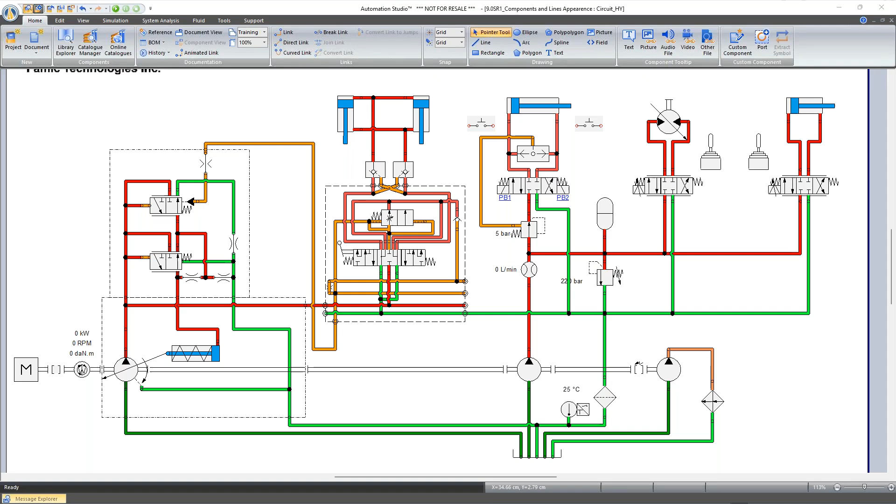Sure. So you always have access to the catalogs here, it opens in your browser, and I've got all of those available manufacturers. So then you browse by manufacturer, and you go get any component.

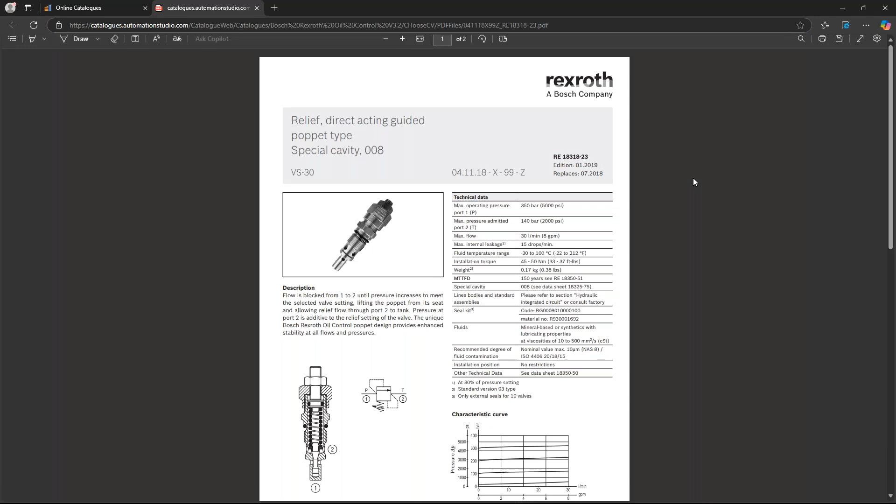So I'll take a simple direct acting relief valve with back pressure, and you configure your specific part number based on the reference model code from the manufacturer. Of course, this model code configurator here refers to what is found in the manufacturer's specification, which is always linked in the catalog, so this is what is replicated in our catalogs.

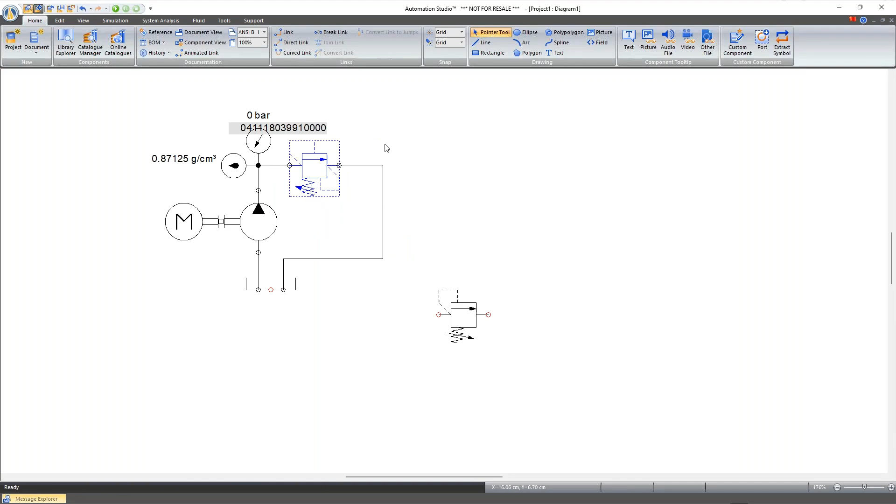And you configure your options, your properties, and then all you got to do is drag and drop into your circuit, and it's ready to use. So in this case, I would use this particular relief valve instead. I can move aside the part number.

The particular properties of that component are modeled in the component, including any characteristic curves, in this case simply pressure drop curves. Of course, since we're talking about simulating failures, we can add failures to components. There are specific failures depending on the nature of the component. For a relief valve, it will be those failures. And of course, you can add a general failure that is valid for any component.

So you could add leakage, that would be external leakage. Maybe increase the parameter, it would be at port P. Then I need to declare and activate that failure.

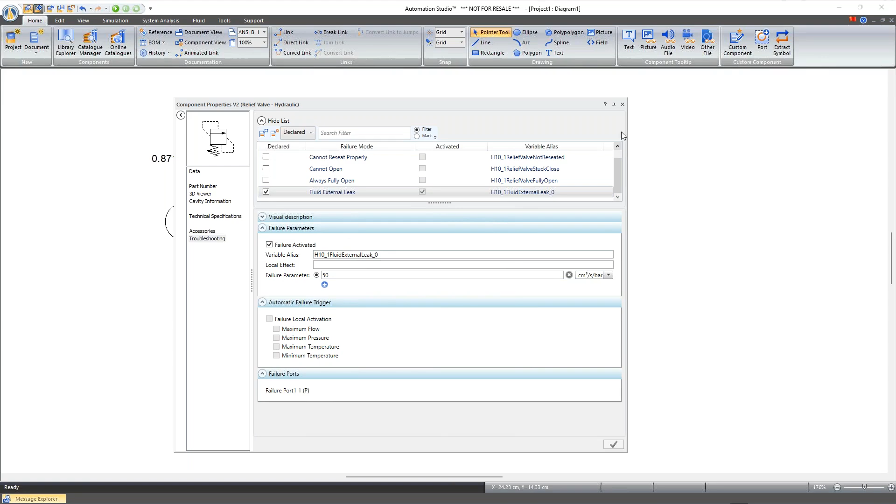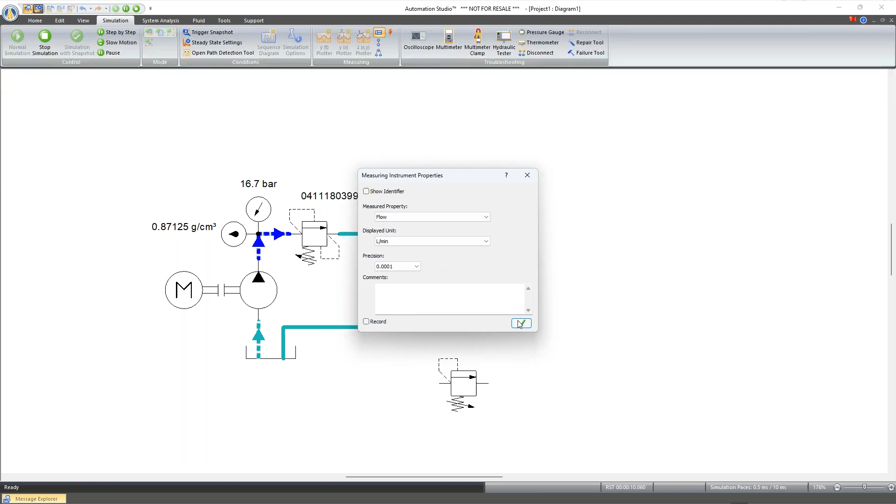And when I simulate, well, here the result is very obvious. I've got no flow coming out of the relief valve because I think I put quite a high leakage coefficient. So now I think I'm losing all of my oil out. Maybe if I decrease the pressure based on the coefficient, I'm still allowing some oil.

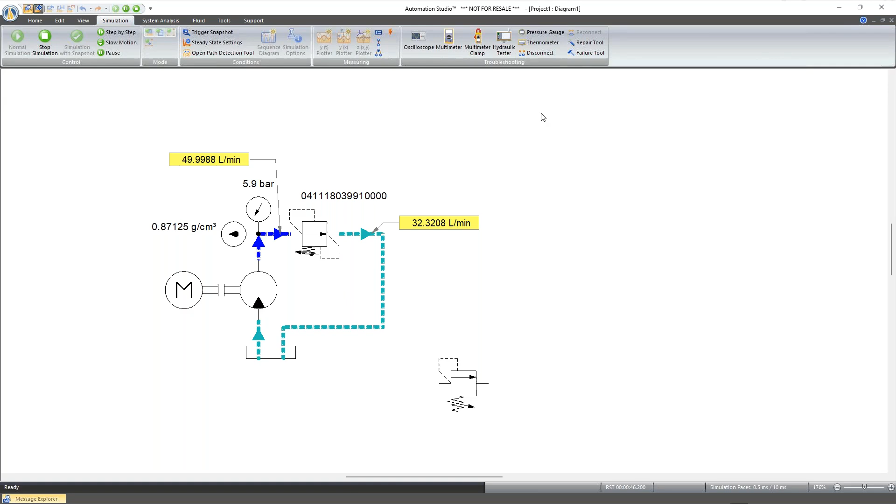I'm still losing quite a bit of oil because of this external failure. So of course, that will result in problems for the circuit. Of course, I'm losing oil. So if I come and measure the height of the oil in my tank, I'll see, well, no, in this example I've used an infinite volume tank, so I would just need to change this setting in my tank. But of course, yes, you can declare failures on components, including manufacturer catalog components.

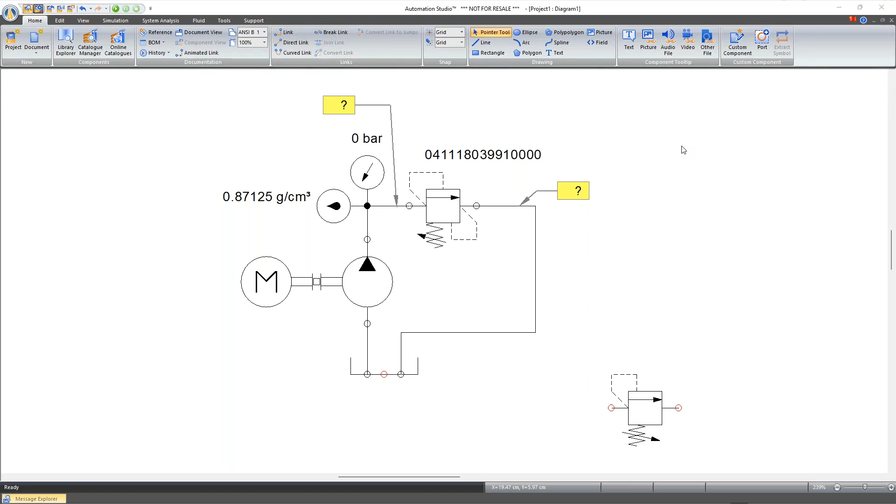Good. Thanks, Phil. Okay, we have some questions related to the manifold. So I don't know, for Nikolaus, will the technical and production drawing documents be exported in DXF format?

Not in this version, but in our coming SR2 version that will be coming soon, we have added the ability to export the production and technical drawing documents in DXF format. Okay, very good.

Will I be able to add my part list to the title block? So in the upcoming SR2 release as well, we've added some dynamic tables that will be filled automatically as you complete your project. Those tables include the part list and the revision table. So when you're editing your title block, you'll be able to add these sections, which will automatically fill in these tables.

So for the revision, as you create revisions, it will automatically add lines. And the same goes for your part list. As you add components, they will be added. Okay, thank you. And I think we have one more question here. Okay, this is a thank you.

You're welcome. Is the only way to view the pressure in our manifold during simulation by hovering the mouse over the specific point? In the current version, yes. In the next version, SR2, similar to what Philip was showcasing with the dynamic measuring instruments, where he was showing differential pressure and pressure at certain points, we're going to have those similar types of tools available in the 3D as well. So you'll have these dynamic measuring instruments that you'll be able to position and always see the value displayed on a label.